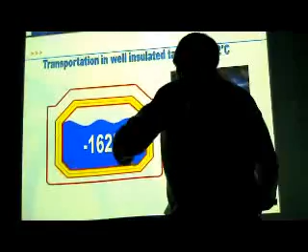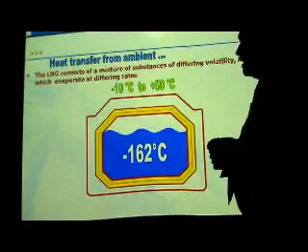So as boil-off occurs, we have to remove the boil-off gas from the tank - it can't stay in the tank. LNG, methane gas, has a number of substances that make it up with different volatility, which causes it to evaporate. The heat flows always from a hot place to a cold place.

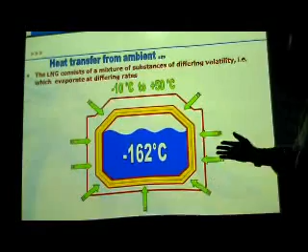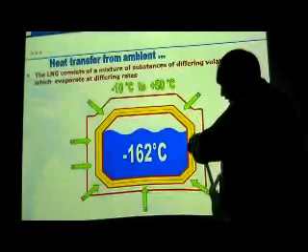So even in ambient outside temperature, even today in Glasgow, heat will still flow into this tank because it's at such a low temperature. The surrounding tank is surrounded with insulation to try and retain as much cold as possible, and we usually have air spaces and ballast tanks around the outside to try and minimise the heat going into the tank.

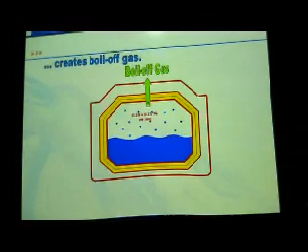So that heat creates the boil-off gas. Boil-off gas needs to be removed from the tank, otherwise the tank will overpressurise, and that's dangerous. We can lose about 0.1 to 0.15% per day of the cargo in the tank to boil off.

Now, we can't vent it to atmosphere. Why not? There are 3 reasons why we can't really vent it to atmosphere. It's dangerous - it's flammable. It's also not environmentally friendly - up in the atmosphere, it would be ozone depleting. And third, it's a valuable commodity - it's a waste of cargo, a waste of money. Somebody had to pay for this.

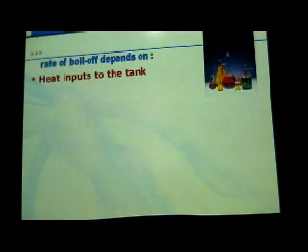So the rate of the boil off depends upon the heat going into the tank. The more heat going into the tank, the faster the boil off process takes place.

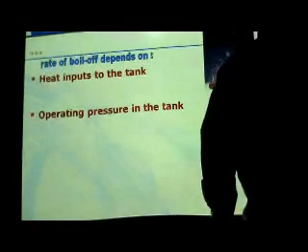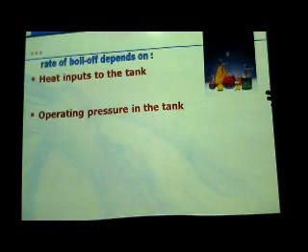The operating pressure in the tank—if we had a small vessel with a tank on, we could keep it under pressure. Think of your domestic tanks, bottles for barbecues, patio gas and things like that. That's liquid under pressure, but it's such a small diameter that the thickness is capable of containing the pressure at ambient conditions. But the bigger we go, the wall thickness has to increase, which adds to the weight.

Sailing conditions during a voyage as well—if the weather's rough and the tank's being agitated, the liquid's all splashing around, that tends to increase the boil off. And then there's the LNG loading and unloading operations.

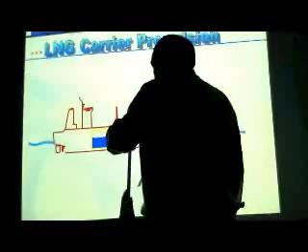So what do we do? When they first started transporting LNG around, the boil-off gas—what do we do with it? Can't release it to the atmosphere. If you look at offshore platforms where they've got gas, they've got a flame, they burn it off. Any boil-off just gets burnt. So we can't do that.

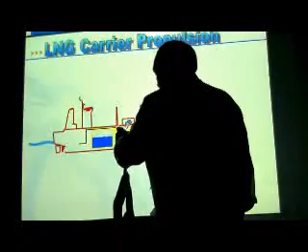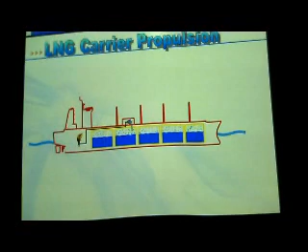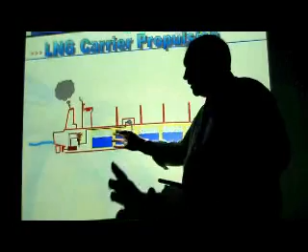So they devised the idea of taking the boil-off gas and putting it back into the ship's engine room, where it got burnt in a boiler, or a pair of boilers. Usually in a steam-driven ship you got two large water tube boilers. And that steam that is generated drives a turbine, which drives the propeller, which drives the ship. So now this boil-off gas, this byproduct of the heat going into the tank, instead of being wasted, we're actually getting a very good resource out from it, because it's driving the propeller, it's driving the ship.

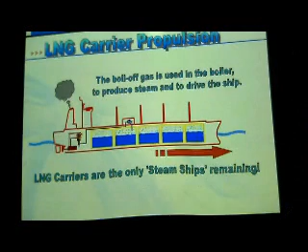So it says here LNG carriers are the only steamships remaining. Maybe not quite true—there's the Waverley, if you want a paddle steamer. That's steam driven.

So in this case, they use LNG as a fuel in a non-LNG driven vessel. It's almost impossible—it's like you need to store it. Once you come out of LNG, you have to have it in a pressure vessel. If it's a non-LNG tanker, for example, then what you'd have to do for a dual fuel engine is to have a receiver, a tank, a vessel that's capable of holding a quantity of liquid natural gas.

So you're going to use this—it's like having a fuel tank. So you would need a circular or cylindrical fuel tank on board the ship to fuel your engine.

A number of years ago, the UK government had an initiative, and I'm sure other countries do it as well. In Australia, for example, a lot of the taxis run on natural gas. They've got a cylinder in the boot of the car, in the trunk of the car, and then it can be dual fuel—you can start it up on petrol and then change it over onto gas. But again, because the cylinder diameter is quite small, it's capable of taking a charge of liquid gas. Now, that might give you a range of 200 miles or something, I don't know.

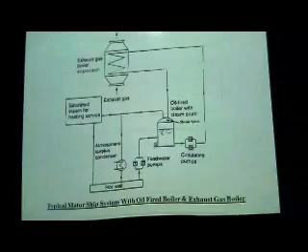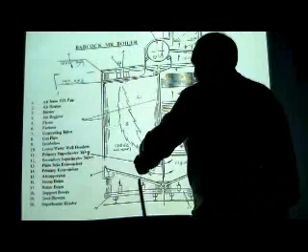This is the type of boiler that the gas and fuel would be burnt in. It's a large roof-fired boiler. It's got a big combustion chamber here, and it can modulate on fuel oil or gas or both.

So the fuel gas mixture comes in through the top. You've got a long flame, and the heat from the gas passes through superheaters and economizers, and then goes to the exhaust up to atmosphere. Now the steam that's generated is what we call superheated.

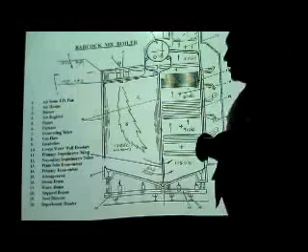So in the steam drum, where we have a mixture of water and steam, we get what we call saturated steam. Saturated steam is the steam which is changing phase from water to vapour at a certain pressure. Now we all know that at atmospheric pressure water is boiling at 100 degrees centigrade.

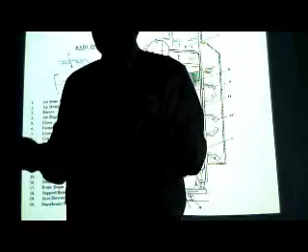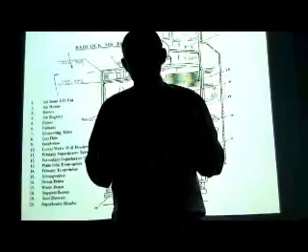In a large boiler, and these boilers operate at 60 bar pressure, the saturation temperature is 273 degrees centigrade. So that's the boiling point at 60 bar, 270 degrees centigrade. So the water won't boil until it gets to 270 degrees centigrade. So all that heat being liberated from the burning of the fuel is changing the water to steam at 273 degrees centigrade.

Now that steam is essentially what we call wet. It's saturated steam. We can't put that into a turbine, because some of that steam will start to condense as it passes through the turbine. Condensing steam passing through the turbine will cause impingement and erosion on the blades and damage. So we therefore have to take it way beyond this temperature.

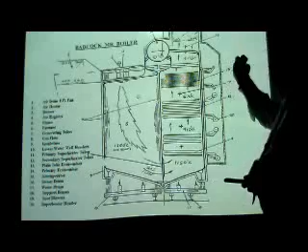We take the saturated steam out of the drum, pass it through a couple of superheaters. A superheater is an external heat exchanger from the drum that takes the steam from the drum and passes it through a series of elements with the hot gases passing over it. We have a control system built in, so we regulate the superheater temperature at about 525 degrees centigrade.

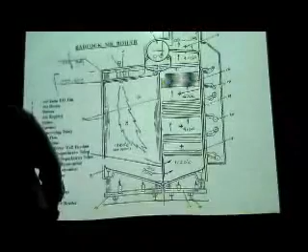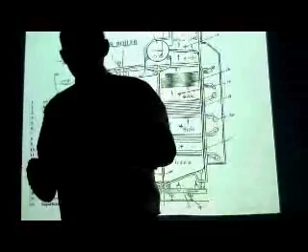So that's to the turbine, at 525 degrees centigrade. Now, because the steam is superheated at 525 degrees centigrade, there's absolutely no liquid at all in it. It's just acting like a gas, a dry vapour now that's going down and passing through the turbine. It acts on the turbine blades. The turbine drives the gearbox, drives the shaft, drives the propeller.

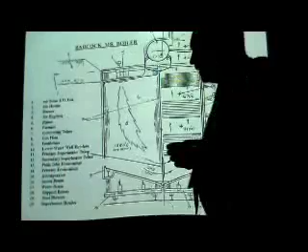So that's the whole frame of the steam plant. Now, I like steam plant because it's all thermodynamics. It's like a heat balance.

The trouble about the steam plant is its efficiency is not fantastic. The boiler efficiency is very good, the turbine efficiency is very good. But the big problem is in a steam plant, what do we do with the steam after it passes down through the turbine?

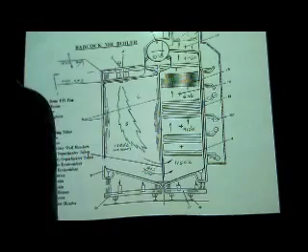We expand it down from 60 bar and 525 degrees centigrade down to negative pressure, a vacuum at about 45 degrees centigrade. So it's gone all the way from 60 bar, 525 degrees, down to a vacuum as it leaves the LP turbine. The huge Achilles heel, the huge problem in the steam plant, is we've got to recondense that steam to get it back in the boiler.

We can't pump steam. Low pressure steam, if we try to pump it, we just compress it. So we've got to condense it to get it back in the boiler. That's where the big loss is in the steam plant.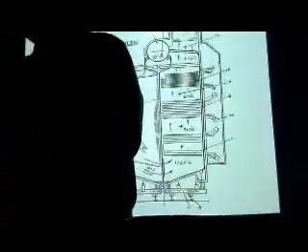Essentially, the heat, and we're talking heat and energy in kilojoules per kilogram, goes into the steam to give it its enthalpy. Its enthalpy rises as it gets higher temperature and pressure. That enthalpy does work in the turbine, and the work, enthalpy in kilojoules per kilogram times the mass flow of steam in kilograms per second, gives us kilowatts, the actual power we get out of the turbine. So we can have 30,000 kilowatts at the propeller, and we're getting that power from the steam. Steam's getting its energy from the heat coming from the gas or liquid fuel we're burning.

Stop me if I'm going too fast, or ask any questions about it. Yeah, just say, yeah? Okay.

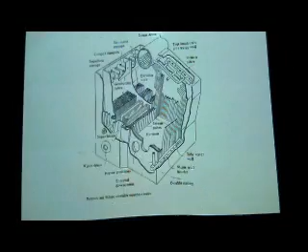To give you a size and scale of marine boilers, they're pretty large furnaces. In the old days, the furnaces tended to have the burners going in at the side, horizontally fired. Nowadays, they're roof fired, which gives a longer dwell time. The heat from the combustion has to get absorbed by all these radiant tubes, and the tubes inside contain water, which is turning into steam. Circulation is very important as it passes through the boiler.

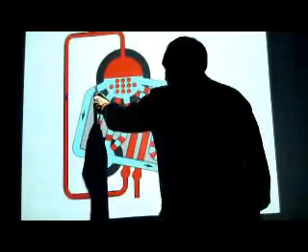What you have is a series of riser tubes. As the tubes absorb heat from the furnace, steam bubbles get created, so the water gets less dense and tends to rise up. Then we have large bore external downcomers, bigger pipes containing much denser water because they're unheated, which come down. So the density of this water forces circulation, and the boiler relies on natural circulation taking place.

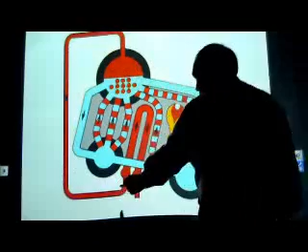The saturated steam generated passes through a superheater and then on to the turbine.

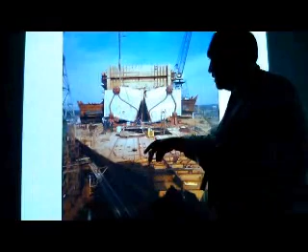This shows you a couple of boilers being installed on the ship. This is the steam drum, and these are the external downcomers I was talking about, the large bore downcomers that give you the circulation. This is inside the boiler, showing the piping and tubes.

Again, just showing what happens: the heat creates circulation in the boiler, saturated steam passes by the superheater, and you get superheated steam to the turbine.

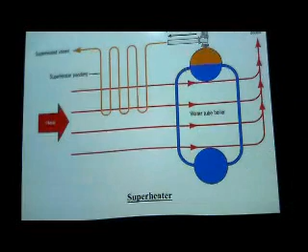And that's just a feed water system. The water in the boiler gets turned into steam and superheated, then passes down to the turbine.

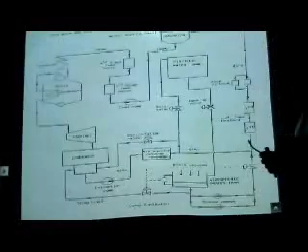This is where the big loss is, in the condenser. A lot of heat has been generated in this steam, and we extract as much work out of it as we can in the turbines, but the trouble is it now goes into the condenser. There we're down at 45 degrees, and we have to get it back up into the system and back into the boiler again, done by pumping it. We have various heat exchangers on the way to try and improve the thermal efficiency of the plant, and try to get the temperature as high as possible before it goes into the boiler again. The higher the temperature going into the boiler, the less fuel it needs to flash it into steam again, so that makes it more efficient.

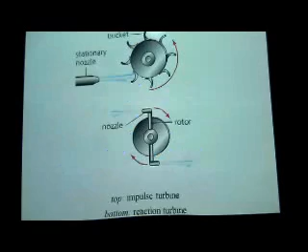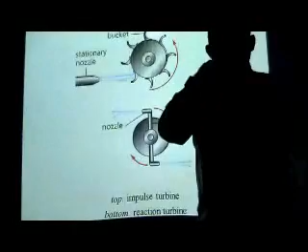Turbines very simply use a nozzle and act on blades. Theoretically there are two types: an impulse turbine and a reaction turbine. A reaction turbine is where steam goes into a nozzle and gets a kick effect, like those windmill toys you might have had as a kid that you blow on. Whereas an impulse turbine is where the nozzle acts on blades.

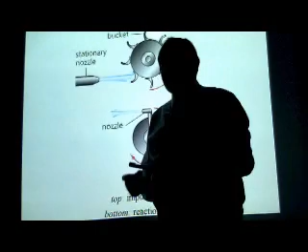If we take high pressure steam from the boiler at 60 bar to 555 centigrade and pass it through a nozzle, it takes a huge drop in pressure at the first stage nozzles. What happens is velocity increases, so you get high velocity, very dry, superheated steam impinging on the blades, and that's now doing work. It's dropping from a high pressure to a lower pressure, doing work on the blades, driving the turbine.

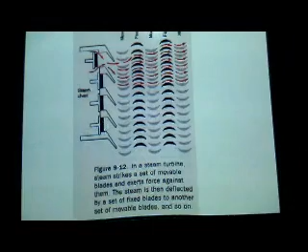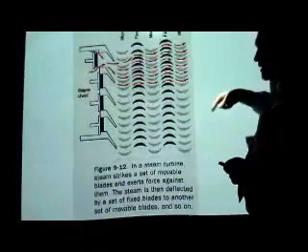As you can see from here, that's quite a complex diagram showing the stages of the blades and the bearings either side. I won't linger on that too long. Suffice to say the turbine consists of rows of moving and fixed blades. The moving blades are all keyed onto the rotor, which is turning, and fixed blades are fitted into diaphragms, which are fixed into the turbine casing. All the fixed blades do is direct the steam at the correct angle onto the next row of moving blades.

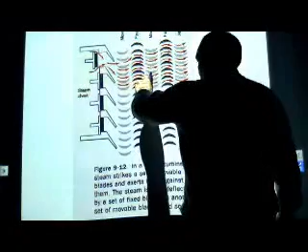So the blades are curved, so the work's done in this first stage of blading here, driving the turbine, and then it's directed onto the next stage, and so on. So essentially, that's what's happening here in a turbine: you've got moving, fixed, and moving blades.

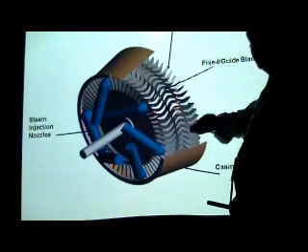What happens as the steam passes through is its volume is expanding all the time, so the blade sizes get bigger as we go through the turbine. It's the same as any turbine, even a gas turbine like you get in an aircraft or whatever. As it goes through the stages, it gets bigger because the blades get larger.

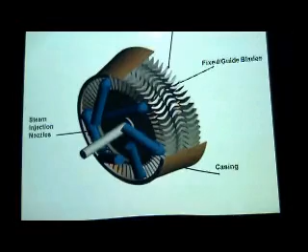The blades are fitted onto the shafts, and they've got to be very strong to stand the forces that are put on them.

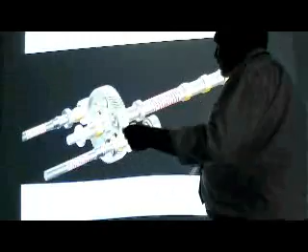Because the turbines operate at their most efficient at very high speed, turbine speed is maybe 7,000 RPM for a high pressure turbine, and about 3,500, half that, for a low pressure turbine. The propeller is efficient at very low speeds, maybe only about 80 RPM for a single big multi-bladed propeller.

So we need a large reduction gearbox, and all that gearbox does is reduce the speed. There's no changing of gears. The gears are what we call a locked train, they're locked together, a double helical gearbox.

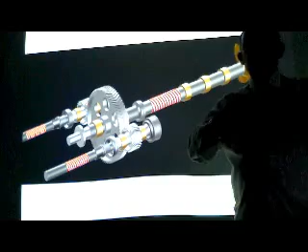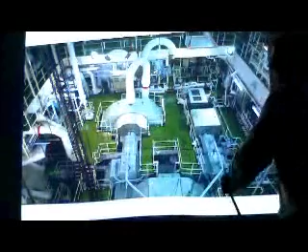This is the high pressure turbine, and that's the low pressure turbine. You can see that they're both going to a common gearbox. They both have output shafts going into this very large gearbox, which goes into a single shaft and drives the propeller.

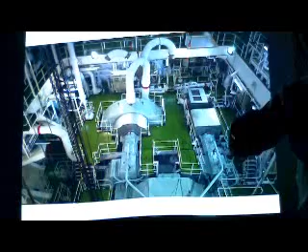So in terms of maintenance, the turbine is very, very reliable. If you think about it, although all the blades are fitted round to all the discs, essentially it's just one moving part. It's just a rotor that's rotating, supported in bearings, lubricated and cooled. It's got a thrust bearing that locates it in its casing. But essentially it's pure torque, pure rotary motion.

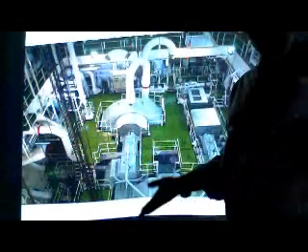Not like a diesel ship where the pistons are going up and down, you've got large reciprocating masses and out-of-balance forces. On a turbine ship, this is why the old passenger ships from years ago, when they used to cross the Atlantic to see who could be the fastest—all the famous liners, the Queen Mary, the United States, the famous French and Italian ships—had turbine-driven ships. So very smooth from the passenger's point of view, very little vibration, because all that's happening is pure rotary motion, pure torque, with no vibration passing up through the superstructure and accommodation. So from that point of view, very reliable.

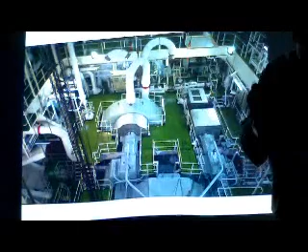These steam turbines, you don't touch them, provided you've got correct water treatment. The water treatment is really important to the boiler, the purity of the water is very carefully controlled, so that the steam we get behaves like a very dry gas, with no impurities carried over. As long as that happens, your turbine will remain in excellent condition.

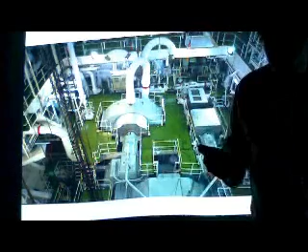What has been happening in recent practice is every 5 years in a dry dock, you would open the casing and have a look inside, just a visual inspection. Now they don't even do that. Provided you take vibration readings and a history of vibration readings and other parameters—temperatures, oil samples, etc.—from your bearings, surveyors like Lloyd's and DNV will say you don't need to lift it up or look inside, because we know it's really good from the vibration history. So it could go for 7 years without even looking inside.

If you look at a diesel engine, how often are you going to look inside that? So from a maintenance point of view, as an engineer, this is very good because it's almost maintenance free. Whereas with a motor ship's diesel engine, you're always doing maintenance, always renewing valves, etc.

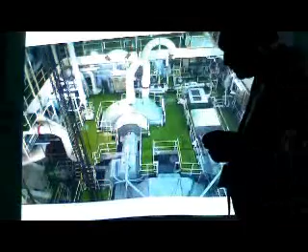So the two things kind of outweigh each other. Steam turbines were very fashionable years ago because they were the only things that could develop high powers. The engine makers caught up and they started building bigger engines.

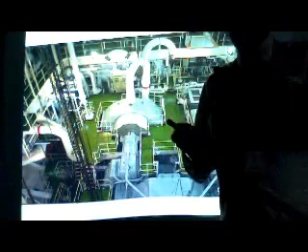Steam then went out of fashion because of the high fuel costs, which is associated with the condensed steam again, which lowers the plant efficiency. So the steamships almost died off. They stopped building steam-powered tankers, oil tankers that is. And then all of a sudden, when LNG came to the fore, then steam made a big resurgence again because it was the ideal vehicle to burn the boil-off gas.

So that's steam plant from the LNG point of view, and why steam plant is now back in favour. Although now what's happened is the engine builders, they've built dual fuel engines that can burn LNG too.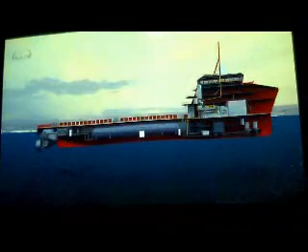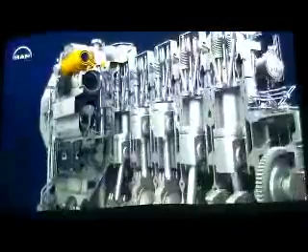To meet these challenges for tomorrow's shipping industry, MAN Diesel and Turbo presents its new fuel-flexible 4-stroke medium-speed engine that can be used for all applications, as a main engine for diesel-mechanic propulsion, for diesel-electric propulsion, or as an auxiliary engine for onboard power generation. The MAN 35/44DF, with its dual-fuel technology and two separate injection systems, makes it run on any fuel available, whether liquid fuel such as heavy fuel oil, marine diesel oil, and marine gas oil, or gas fuel like LNG. The 35/44DF is based on MAN's well-proven 32/44CR engine.

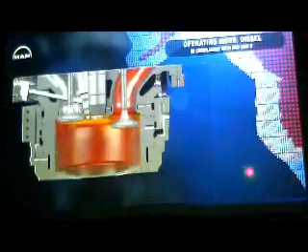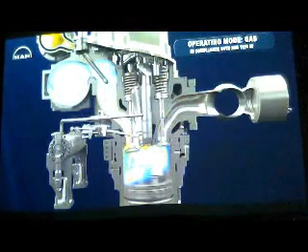Both engines feature a state-of-the-art common rail system with injection pressures of up to 1,600 bars. In diesel mode, this system and other technologies enable the 35/44DF to fulfill the current emission regulation IMO Tier 2. To meet the even stricter emission limits of future regulation IMO Tier 3, the 35/44DF can also operate in gas mode. Switching to gas can be done on the fly at loads between 15 and 100% with no loss in engine power. To ignite the air-gas mixture, a small amount of liquid fuel is injected by a separate pilot fuel system. In gas mode, the MAN 35/44DF fully complies with IMO Tier 3, lowering CO2 emissions by 20% and other emission levels by up to 99% and beyond, compared to liquid fuel operation.

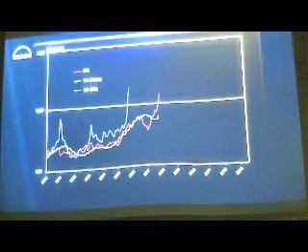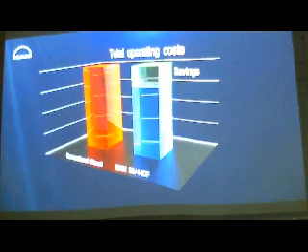In addition, using gas as fuel also provides substantial economic advantages. Over the past years, the price difference between liquid and gas fuels has increased steadily and is expected to keep growing. As fuel makes up the largest part of ship operating costs, reducing fuel expenses is the most effective way to keep shipping affordable. Already now, using natural gas as main fuel enables ship owners to save fuel costs by a double-digit percentage compared to a conventional diesel engine. When looking at total operating costs, the savings potential becomes even higher. The MAN 35/44DF allows ship operators to fully harness this potential, plus the flexibility to switch between fuels at any time for optimum resource utilization.

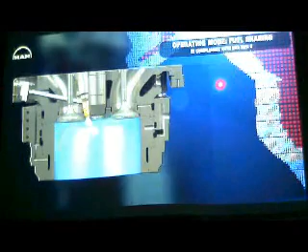For sustained operation on a wide range of gas qualities, the 35/44DF features a fuel sharing mode. In this mode, both gas and diesel supply systems are active, which lets the engine run on multiple ratios of gas and liquid fuel. This makes the 35/44DF virtually immune to variations in gas fuel quality, allowing it to operate even on gas that would be unusable for a conventional gas engine.

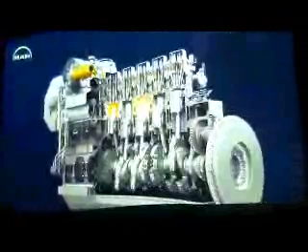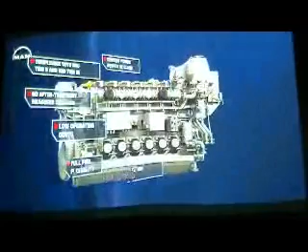Highest power output in its class, compliance with IMO Tier 2 and Tier 3 without aftertreatment systems, low operating cost due to affordable gas fuel, complete fuel flexibility, a robust design based on proven engine technology, the ability to upgrade IMO Tier 2 compliant 32/44CR engines to dual fuel operation entirely on board, and an increased vessel resale value due to an engine that fulfills all regulations for many years to come. All this makes the MAN 35/44DF the perfect choice to keep cost of ownership down and give ship operators the flexibility and sustainability they need.

With the 35/44DF and the larger 51/60DF, MAN Diesel and Turbo offers its customers a complete range of fuel-flexible four-stroke medium-speed engines that fulfill all economic and environmental demands of tomorrow's shipping industry today.

Now that was an advert for MAN, and that was just to let you see how many companies were there.

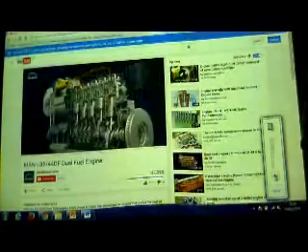But you look at the diesel engine, how complicated that is with the pilot fuel and then the gas being injected, and it all has to be timed, and then the timing has to be maintained, change switch after a while - electronics sometimes are not so reliable.

So it goes down to you as a ship owner. If you're the ship owner, what do you want? Do you want to go with what's proven? You know this LNG ship has been sailing around with a steam turbine plant for years, and it's reliable, very reliable. Do you want that, or do you want to go for the cheaper option, fuel wise, which is the diesel engine? But looking at what we talked about earlier...

Non-LNG tankers will still have to carry diesel fuel, but they will also have to carry a cylinder, a pressurized tank full of liquefied gas to be able to use in the engine. That's what we'll be supplying that engine there, that MAN engine.

For the LNG and LPG, they are charging the cargo, commodity with the fuel, they are using the boil-off from the cargo to run their engine. They still keep some amount of liquid fuel on board. In the cargo tanks, yeah, in the cargo tanks.